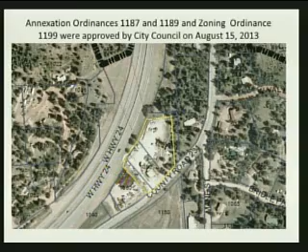This property, the last time you saw this was on May 23rd. It was in making a recommendation regarding the zoning for the Teller County Waste site, and the annexation ordinances and the zoning ordinances went through its statutory process, and City Council approved the annexation and the zoning on August 15th. So just a couple months ago.

And with that, I wanted to just orient you toward the zoning map, and the community commercial zone that was selected for this site is consistent with the other hot pink areas along Highway 24. They also extend up Highway 67, and then on the east side of Woodland Park along Highway 24 and up Baldwin and Rampart Range Road.

This, you'll recall from our zoning discussions, is not the most intense zone in the city. It is also not the least intense zone. So it is a zone with which contractor services and vehicle repair maintenance is allowed with an approval of a conditional use permit. The recycling collection center is slotted in our zoning regulations as a special use permit, and it can be located in any zone as long as it can fit within the 11 criteria that we will be reviewing this evening.

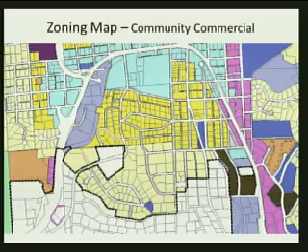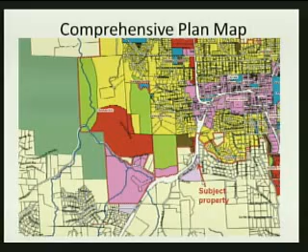I also wanted to share the comprehensive plan map that was recently adopted in the 2010 comprehensive plan, and this property is in a pocket of commercial property that in 2010 was outside the city limits. So this area was slated for commercial development in the future based upon the comprehensive plan map.

A few photos of this site, and these were taken prior to the May meeting. This is the existing building that will function as the vehicle repair and maintenance facility. And this also shows the access drive and the slope up to the upper tier where the recycling center will be located, and the parking of no more than 12 vehicles to service Teller County Waste, and the employee parking. You'll see that this is now a gravel area. This is all going to be hard surfaced as a result of the improvements to be done, and I'll speak more specifically to that.

These are two photos that I took from Highway 24 up above the property. So you can see that it is adjacent to a major arterial to Woodland Park. However, the primary access is off Teller County 231, which is a collector street in the Teller County classifications. And this gives you a good view of how the trash vehicles and trucks will be parked behind the building and behind a buffer wall.

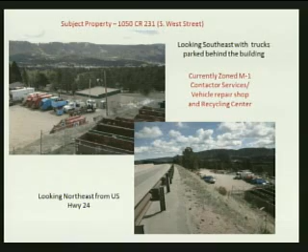This is taken from Teller County 231. This is an existing driveway that goes to the second building on the site. There is a small home that was built in 1960, and this home will be converted into an office building for the operations of Teller County Waste. This driveway will be abandoned and reseeded so that there will not be any transfer of sediment off this driveway.

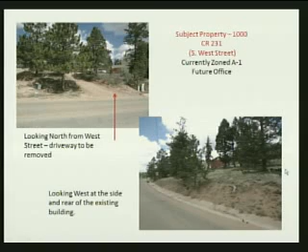And then the lower picture is taken so that you see the side of the building, and this is the Turner's property that is right in front, and there will be a fence that will sit up here next to the building, a 6-foot-high fence, and then it will transition down to the property line, and that will be an 8-foot-tall privacy fence. And I wanted to point that out on this photo. This is the Turner's home that sits directly adjacent to the subject property, and here is their driveway.

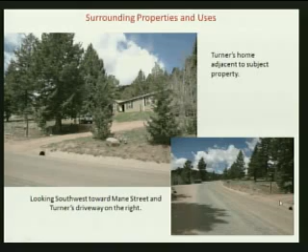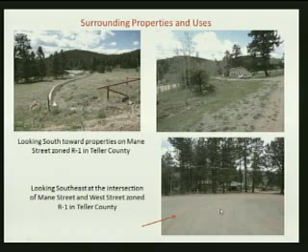The other homes that are close by in residential zones are to the south and also to the west, or east. I'm sorry, these are to the southeast. And then to the west, here's the existing entrance. To the west is property that is owned by CDOT. It is leased by Waste Management, and their lease with CDOT is on M1 property. To the opposite side of the road is Aspen Valley Ranch, and that is zoned agricultural. So there's quite a mix of uses in this area.

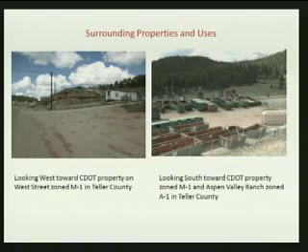There's also some lighting specifications or a cut sheet. There will be new lights on the building, and I'll point those out when I show you the elevation. And they will be full cutoffs. They meet the dark sky standard. And then this is also an exhibit of the gate that will be installed at the entrance to the yard and the recycling center. These specifications deal with the seeding of the area so that we can have a high altitude uplands, low water, low growth seed.

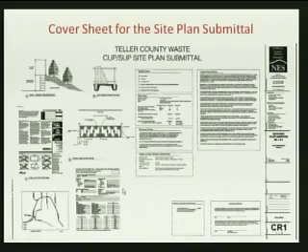And between the office and the employee parking and the truck parking will be the berm that's landscaped with a 6-foot-high block wall, and on top of that will be a 6-foot-tall solid fence. So in essence, there will be a 12-foot buffer berm structure that will isolate the employee parking, the truck parking, and the recycling area.

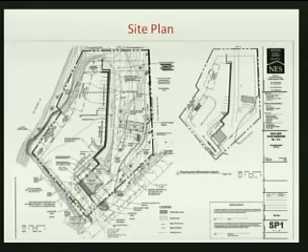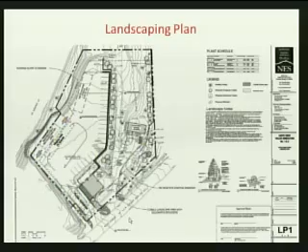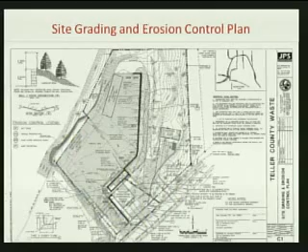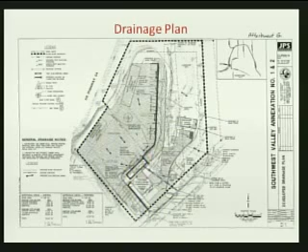There will be an 18-inch concrete pipe that will be underground and then outlet into the existing concrete ditch that functions very well along County Road 231. That water all eventually goes down through Gray Horse Ranch and then down to Fountain Creek, eventually through a network of other detention ponds and ditch lines. There will also be a curb and gutter system placed in this parking area that will serve the office. So the drainage has been reviewed by Bill Alsbach and has been approved to meet the criteria for Woodland Park.

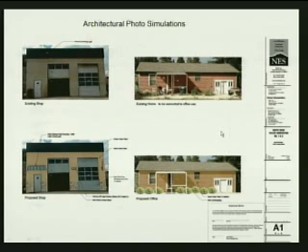Here are the architectural photo simulations. The top photos are the current buildings as they exist today. The enhancement to the shop, the vehicle maintenance building, will include a stone veneer on the front to decorate up this lower portion, and then a new awning over the door to make that more inviting. That will have some lighting underneath it. There's an old Cobra head light that exists on the building today that will be replaced with a fully shielded downlit light, and then the building will be repainted as well as the doors. The office building will also receive some landscaping and a new coat of paint.

I want to talk a little bit about the traffic, because through the annexation process, the applicant engaged a consultant, LSC, to do the traffic impact analysis, and also engaged a consultant to complete a geotechnical roadway evaluation on this section of West Street. One of the conditions is that the trucks utilize this portion of West Street for their daily routes, except for 2 days a week when the trash trucks are servicing the neighborhood. Right now there are 7 trucks that service Mr. Baker's business. There is a limit that only up to 12 trucks will be allowed with this conditional use. So there is a build out on this business as a result of the annexation and the conditional use.

What was discovered in these analyses is that LSC determined, based on our population and a certain percentage of people that may use a recycling drop-off area, that they predicted 111 average daily trips to and from the site as a low, and up to 165 average daily trips. Currently, with 7 trucks and no recycling center, there are 32 average daily trips. West Street is under 1,000 average daily trips. This addition of growth and the recycling center will increase the existing traffic by 5.2 to 8.9%.

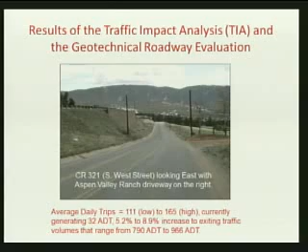So what the geotechnical survey said was that the existing road surface was in good shape. It has 1.5 inches of chip and seal over a very stable native granular base or soils. The geotechnical report recommended that for the impacts with this use, it would be advisable to do another layer of chip and seal, either 3/8 inch or 3/4 inch chip and seal overlay.

The applicant agreed to that, and in fact, the annexation agreement was written so that he would complete that by August 1st of next year and secure those improvements up to $19,500. And if he did not do the improvements by next year, August 1st, then that money would be transferred to Teller County for them to complete the work.

However, Teller County's standards did not match with what the geotechnical engineer recommended. Teller County's standards, in order to meet an adequacy level, and Brian Kincaid is here this evening, and he is the expert on the highway standards for Teller County if you have questions about that. But the adequacy standard really requires an additional inch of asphalt overlay to meet Teller County standards.

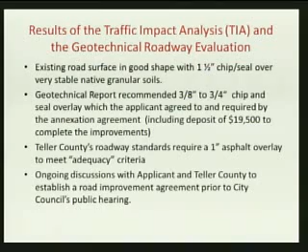So that's a quick overview of the proposal and the improvements that are being proposed. Now we will quickly review the 11 criteria and the justification for recommending approval with 8 conditions associated with this application. The first criteria for a conditional and special use permit is that there's a demonstrated direct need for this use to be located at the proposed location, and that there are adequate mitigation measures to lessen the identified impact.

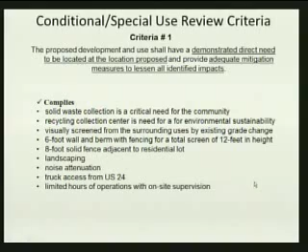And if any of you did use the drop-off site at Walmart, we know that when it's a voluntary site, there's oftentimes issues related to that. So they are dedicating staff to be supervising this site. Criteria number 2 deals with the use shall not endanger the public health and welfare.

There was a Phase 1 environmental assessment completed as part of the annexation process, and it concluded there were no environmental concerns on the existing site. The applicant will be removing the existing septic systems and connecting to the city sewer, removing that risk of old failures of leach fields and septics.

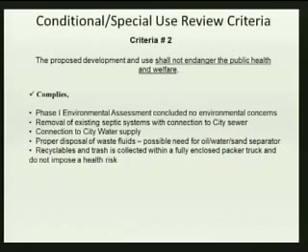The applicant will be connecting to the city water supply, therefore allowing for safe and reliable water for cleaning and for the staff and the public. There will also be a requirement for proper disposal of waste fluids, and then we will be able to evaluate whether there will be a need for an oil, water, and sand separator. And lastly, the recyclables and trash are collected within a fully enclosed packer truck, which do not impose a health risk.

Number 3, shall not substantially injure the value of vicinity properties. I believe this complies. There have been similar uses on this site since '94. In fact, the shop was first built in 1985, and it was used by Books as an auto repair center. It's been a welding shop since 1992. Mr. Baker has used the site since 1994. There are significant upgrades to the site, including the landscaping, the hard surfacing, drainage, and architectural enhancements, and that will mitigate an eyesore. The recycling center is properly buffered and supervised.

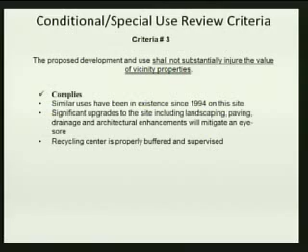Criteria number 4 is that the proposed development and use shall be in harmony with the area in which it is located. This complies because it was zoned industrial and agricultural when it was in unincorporated Teller County for many years. Now community commercial, that is in essence a down zone to that property, which means it's a less intensive use than the industrial, and there's a variety of uses that agricultural can carry as well. Again, significant enhancements to the site. It's adjacent to US 24, which is a major arterial with 20,000 average daily trips, and it has convenient access via the signal at the intersection of US 24 and County Road 231, a collector street.

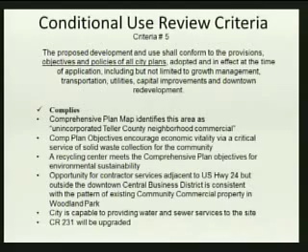Criteria number 5 talks about the objectives and policies of all city plans. This area on the comprehensive plan map is identified as Teller County Neighborhood Commercial. The comp plan objectives encourage economic vitality via a critical service for solid waste collection for our community that provides an economic basis. The recycling center meets the objective for environmental sustainability, and this provides an opportunity for contractor services to be located adjacent to Highway 24 but outside the Woodland Park Central Business District downtown core, and so it is consistent with the pattern of commercial property in Woodland Park. The city is capable of providing water and sewer services to the site, and County Road 231 will be upgraded.

Criteria number 6 talks about conformance with the city regulations, specifically the zoning, subdivision, utility, building and construction, business regulations, and engineering specifications. The site will conform to all relevant building codes and fire codes. There is the addition of a fire hydrant at this site, which will help the entire neighborhood. The site improvements do meet the zoning and engineering specifications, and the applicant is required to process a subdivision plat to combine these tracts that are currently deeded by metes and bounds description, and that plat is required to be submitted before November 13th, and must be recorded before the certificate of occupancy is issued on any remodel. We have been in conversation with the surveyor, Rampart Surveys, and he is planning on a submittal in the next week or two.

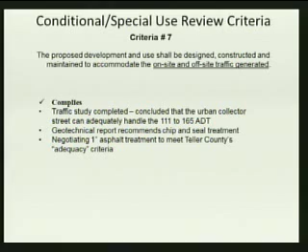Criteria number 7 deals with the on-site and off-site traffic generation. I've reviewed the results of the completed traffic study that shows they anticipate between 111 and 165 average daily trips. This collector street, which is averaging a little bit under 1,000 average daily trips, can easily handle that traffic. The geotechnical report recommended the chip and seal treatment, and we will be negotiating the 1-inch overlay with Teller County to meet their adequacy requirements with the applicant.

Criteria number 8 is regarding the topography and the surface drainage and any man-made hazards. There is no significant grading that will occur here. In fact, the existing trees and native grasses and shrubs will be retained where feasible. There are no streams or man-made hazards. The refuse will be emptied from the trucks on a daily basis, or the next day when they complete their routes, so it will be held within the packer portion of the truck, which is completely enclosed and contained. The drainage system I have described that will collect, convey, detain, and release the rainfall will also be filtered through a sand system, so it will help with the water quality.

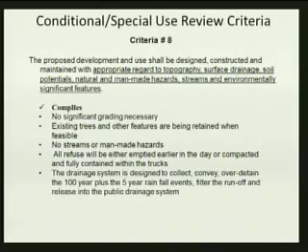Criteria 9 deals with other utilities such as water, wastewater, solid waste, air quality. As mentioned earlier, the water and sewer mains are located in West Street, so the applicant will be able to connect to those main systems after purchasing his water and sewer taps.

The solid waste is going to be handled on site adjacent to the recycling area in a small 96-gallon tote. No refuse will be taken out of any garbage truck on site. That is a condition of the annexation agreement. Roll-off containers that will be stored in the 2,000 square foot designated area will be emptied and clean.

Air quality effects are mitigated because the trucks meet the state standards for diesel trucks. Proper warming up of those engines will be limited to the 15 minutes or minimized to the extent possible. The detention pond has a sand filtration system, improving water quality again. And the site is required to be monitored daily for any airborne paper or litter.

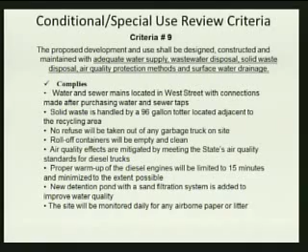Item 10 is to not increase the fire danger or explosions. As mentioned earlier, the construction will comply with the international fire codes, and proper safety protocols will take place with the vehicle repair.

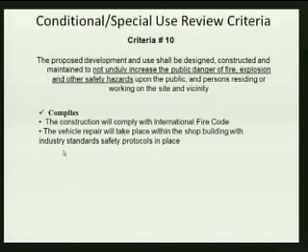Item 11 deals with architectural design, fencing, landscaping, buffer areas, or other aesthetic enhancements. We've described the site improvements for buffering and fencing and landscaping. I've described the new architectural treatment to the shop, including the stone, the new paint, a canopy, and the full cutoff light fixtures, and the sprucing up of the former house with new paint.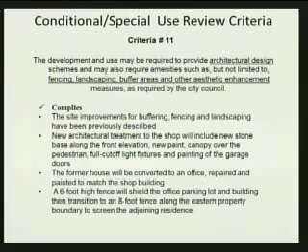Lastly, we've talked about the 8-foot and 6-foot high fence, which is going to be placed adjacent to the property line between the residence and the office. So those are the 11 criteria, and the recommendations in the staff report are fairly lengthy, but there are 8 general areas. The first area are the criteria dealing with the contractor's office and yard with the vehicle repair and maintenance. The first item, 1A, is the limitation on the operation hours.

Item B deals with the exiting and entrance of the trucks throughout the week. Item C is that all the roll-off containers must be cleaned and emptied, and that no refuse or debris may be stored on site within the roll-off dumpster area.

The commercial trash truck that picks up mostly the dumpsters from restaurants and other commercial businesses, we understand from Mr. Baker that that truck will be emptied daily. So there will not be the refuse from the restaurants or other commercial businesses that will remain on the site overnight. To alleviate the truck noise, the backup alerts will be disabled while in the yard.

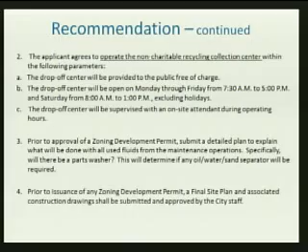Number 4, prior to issuance of a zoning development permit, a final site plan and associated construction drawings shall be submitted and approved by the city staff. Item 5, this is a comprehensive list of the terms and conditions in the annexation agreement that are important to acknowledge and continue forward into the conditional use, special use permit.

The various sections are referenced, and they contain conditions such as that the transfer of trash is prohibited on the site. Currently, there's a definition of the interim operations that Mr. Baker is operating under until the conditional use, special use permit is acted upon. The completion of the required improvements to the site and the addition of the roadway improvements to Teller County 231 are acknowledged in the annexation agreement.

There shall be a deposit of 110% for all the site improvements reviewed in attachment N, that equal $260,000, almost $261,000. There's a requirement to remedy the questionable area, a quiet title that is going to be deeded over to the Turners, to clean up this questionable area.

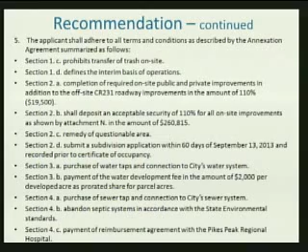The last 3 conditions prior to the zoning development permit: the applicant shall pay the necessary transportation capital fees as calculated by the city engineer, based on the average daily trips generated above and beyond the 32 that are there today. The applicant shall pay the stormwater capital fees for any new impervious surface, if there is any. I believe most of the yard is already considered impervious because of its compaction. And then lastly, there will be a need for payment of fees in lieu of sidewalks.

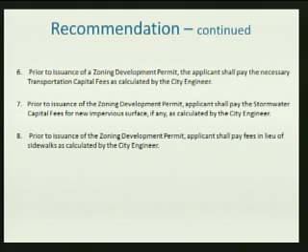The city has a requirement that any new commercial or substantially improved commercial property above 25% of the value of the buildings must either install sidewalks or pay fees in lieu of sidewalks. We felt that the fees were more appropriate here than to build a small section of sidewalk in front of this property. So with that, that concludes the review.

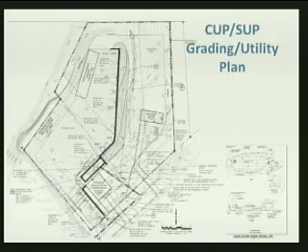There are additional improvements today. There is a culvert along that driveway that has collapsed and is no longer adequate to get the drainage across. So a new concrete pipe will be added across both of those driveways to remedy some of the drainage issues along the frontage of the property as well.

Facilities operations, here's a quick summary. Again, 6:30 start time for all vehicles in the yard. Sally discussed the 15-minute warm-up period for the diesel trucks, with a maximum to 5:30 p.m. For the vast majority of the year, that is not a problem to meet that 5:30. Obviously, there are weather occasions up here where some trucks get stuck in more rural portions of the county and may come in after 5:30. But by and large, those will be the operation hours.

Recycling drop-off hours for the public commence at 8 a.m. Monday through Friday and will close at 5 p.m. Again, that will be a monitored recycling collection center. Saturday, we'll have reduced hours from 8 a.m. to 1 p.m., no collections on Sunday. Truck start time at 6:30 in the morning. Typical truck return times are between 3 and 5. And Sally discussed the noise mitigation of the backup beepers. Those alerts will be disabled through a switch on the dash, and will be managed by the driver.

For the review criteria, Sally discussed the 11 review criteria. We provided our comments as well in your packet, and I won't go through each one of those items. The recommendations, the 8 recommendations, but quite a few sub-recommendations that were in there, have been reviewed by my client and accepted, with the one correction of the 7:30 start time for recycling to 8 a.m. And we are in agreement on the improvements and the cost estimates and all those conditions that were outlined for you in the staff recommendation in your packet. Because Sally did a very thorough job on the criteria and those other items, I've kept my comments brief. I'd be happy to answer any questions or comments you may have at this time.

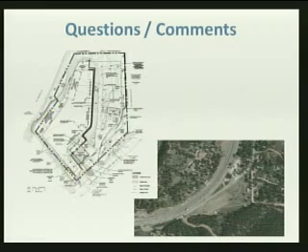I noticed out in front of the proposed shop there's a lot of scrap iron, is that going to be taken away? That's all part of the welding operation that is currently being removed out of the building at this time. And then up top in that yard, there was a lot of firewood. That is also on the former portion - the original industrial portion of the property was approximately here, and then this was the agricultural piece. The previous owner of that area operated a firewood business, and that debris is currently being removed at this time.

And then I also - I think you might have already addressed it - but there was a trailer on the proposed driveway on the left-hand side of that driveway. Correct, and up top too, that appeared to be used for storage. And those trailers that are along this driveway on the south side, that area will be removed. Those trailers, and there's some walls and things that are going to be moved along that south boundary line as that property gets cleaned up. And then once that fence is installed, is there something in this condition that the fence is going to be maintained?

I'll give you my opinion on how the code reads. If the fence is damaged and becomes a code violation as part of the screening and buffering requirement for the property, it would need to be repaired as required as part of that maintenance. I think we'd be willing to agree to add that maintenance requirement if that's desirable.

Well, it just seems like it's going to be a real eyesore if it's not properly maintained. It's going to get aged and deteriorated, and that's in a pretty open area with lots of wind and things. I would like to see something in there that's going to assure that fence is maintained properly.

And then the other question, because I drove up the roads and around and came back down, that's quite a slope where that entrance is going up to the top. Correct. What about snow removal? Because I can see coming down that hill and having a real challenge going out onto West Street.

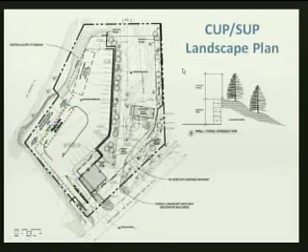It's landscaped. You've got this pretty berm you're putting in there nobody's going to see. We hope. That's the plan. One of the things also is that we are doing a fully automatic irrigation system. Now that we have central water, all the landscaping on the site will also be irrigated. So that's the maintenance component not only of our fences, but also of our landscaping. Okay. Anybody else have any questions?

I had one additional comment or question for Sally. Having our city code officer conduct bi-monthly inspections of the site. Wouldn't it be nice if we could do that monthly, early on, and see how things go, and then maybe you can go to bi-monthly. But I would think every 30 days certainly wouldn't be too much at the outset, because a lot can happen in 60 days. Well, that's fine. I would make a commitment to the planning commission that I'm going to be driving by it on a regular basis.

And I failed to mention one item that we have promised the neighborhood, which is a construction schedule. Obviously, Mr. Baker is currently operating out of that site as an allowance through the annexation process. And so one of the things that we're working on at this point is a construction schedule with timing of the improvements and how sequencing of the construction will take place. We will be providing that to staff and the neighborhood as well, so they can understand timing of construction and the improvements.

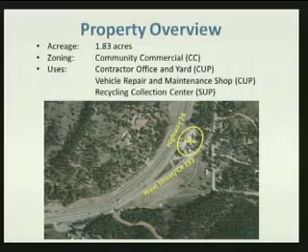First of all, the first thing I'd like to do is clear up this that keeps coming up historically about this M1 property. I just want to let everyone know that, yes, it was zoned M1 with the county, but also, I want to bring up the fact that Mr. Baker has been operating illegally there since 2005, when there was a court order that told him that he was operating without a permit, and he continued to operate without a permit with the county. And so, even though I keep hearing that he's been grandfathered in, I don't know how you can be operating illegally and be grandfathered in. So that's just a comment I wanted to make.

What I'd like to talk about today, though, is just some different terminology. The Woodland Park Municipal Code 8.04-010 defines refuse as, and I won't go into all of it, but it starts out with grass, but then goes shavings. Then it says paper, okay, that's recyclable. Ashes, rubbish, containers, boxes, glass, cans, bottles, those are all recyclables. Garbage, waste, et cetera, is refuse. Just want to make sure we're straight on what is refuse.

And when you go to the staff report that's dated October 10th on page 2, if you want to follow along in the middle of the paragraph, it says it is important to emphasize that no trash will be transferred from the collection trucks to the containers. The definition of a transfer station is a site where refuse and recyclables are collected, sorted, handled, and stored in preparation for processing. The transfer of trash is not permitted in this city.

Was up at 3 this morning. Okay. We get the coyotes almost every night in the wetlands down there. But no, not here in town. Yeah, I always hear the coyotes. Are we back on? It was going to be great until it kept me up at night. Yeah, the city council, like, this stuff's all out for those meetings. Yeah, that's right. You gotta get yourself a suit. I'll give us 30 seconds for everybody to kind of get back, and then we'll start.

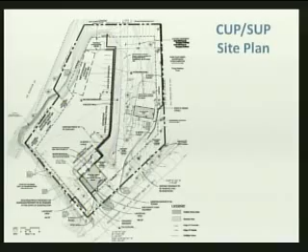The way we're correcting the situation with the Turner's property is that we will be doing a quitclaim deed, and my client's property dispute with the Turners will be resolved in that my client is quitting any claim to the property. So it's a quitclaim to ownership of that ground, and that will be dedicated to the Turners with the approval, and that was part of the annexation agreement, that property be transferred. And so the exact easement location and the property line dispute are one and the same as far as how the error occurred. The intent of the easement is clearly being maintained, and that driveway is being provided for that access to the property to the north.

As far as metal recycling, again, I touched on that earlier: no batteries, no hazardous wastes, those uses will not be allowed. And then there was discussion about the definition of harmony and adjacent property owner use, and what improvements are we making on this site to be harmonious with the surrounding properties. You can see that there's not harmony today, right? We recognize that the site, from an appearance standpoint, is not up to Woodland Park standards. It also is in disrepair.

Mr. Baker has been leasing the property from the property owner for some time. He now owns title to both parcels, is platting the property as discussed, and with that effort is intending to create a business which is consistent with Woodland Park standards, and will do its best to be a good neighbor. Is the use the crux of the issue? Obviously it is. That's an operation and a management standpoint. Mr. Baker is committed to making sure that everything that has been discussed in the staff report and the conditions and operations standards that are being put on the property will be maintained, and as the property continues to operate in the future, I'm sure there will be lots of eyes watching to ensure that that occurs.